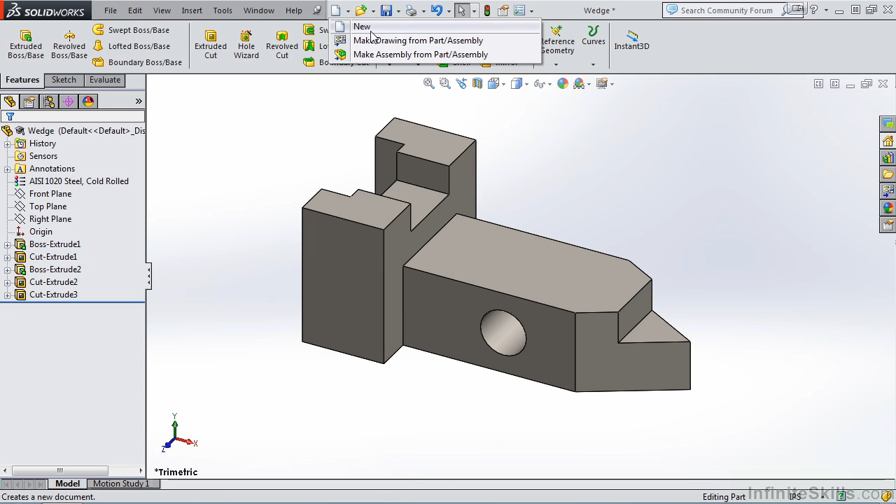Since we're talking about driven dimensions, there's really no need for us to be in the part environment. So let's go directly into the drawing environment and create a drawing for this wedge. I'll select the drop down next to New, Make Drawing from Part. We'll go with the same sheet size as in the previous lesson, and once again change the units to IPS. Just like the last lesson, I'll insert my front view, and place the front view, right-hand side view, and top view.

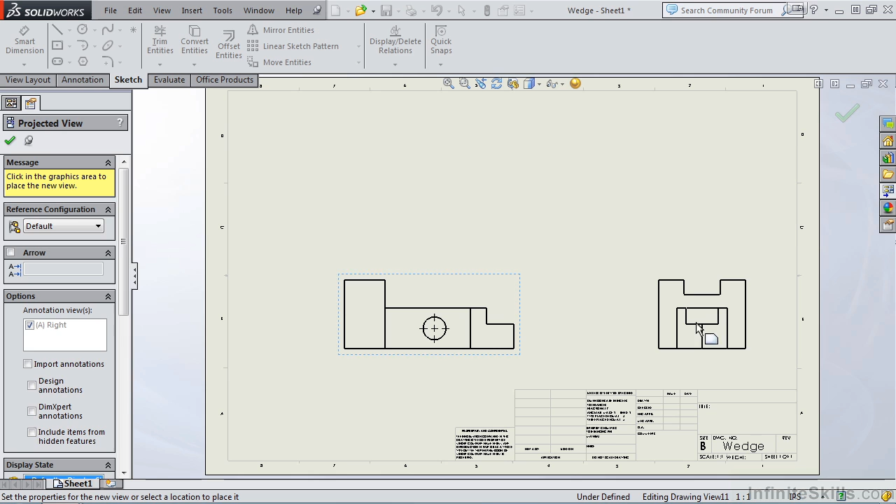Now I'm ready to insert driven dimensions. Driven dimensions are also found in the annotation ribbon, where model items is used for driving dimensions. Smart dimensions are used for driven dimensions. However, if I check the drop down below smart dimension, notice all of the different types of driven dimensions we can apply. Really nice, a lot of options here.

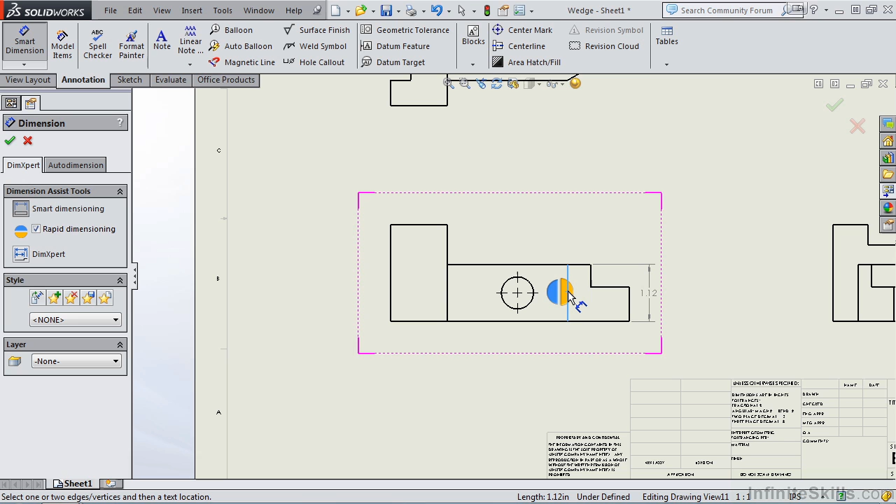I am going to simply select smart dimension. I'll go out to the screen and select this line right here, and notice it gives me a preview of 1.12 inches. Also notice I have a circle on the screen - we call this circle a manipulator. If I have my cursor on the right side of the circle, the dimension is placed to the right of the view. If I move the cursor to the left side of the circle, the dimension is placed to the left of the view. So that manipulator is very handy.

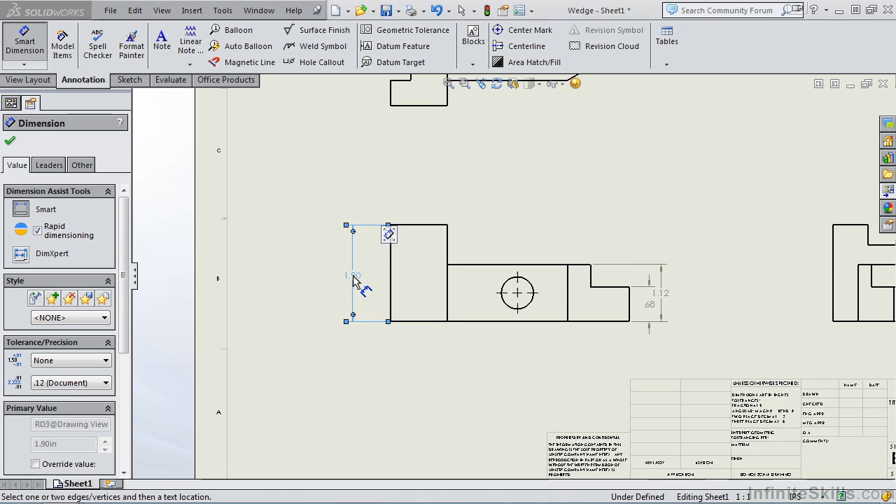Let me go ahead and dimension this feature. Notice how it moves the larger 1.12 dimension to the outside, so we do not have crossing extension lines and dimension lines. Now let's say, for example, you don't like where it's placed in the dimension. You can simply move your cursor away from the manipulator, and then you're free to place that dimension anywhere on the screen. Now, if we dimension a circle, notice the manipulator is 4 quadrants instead of 2.

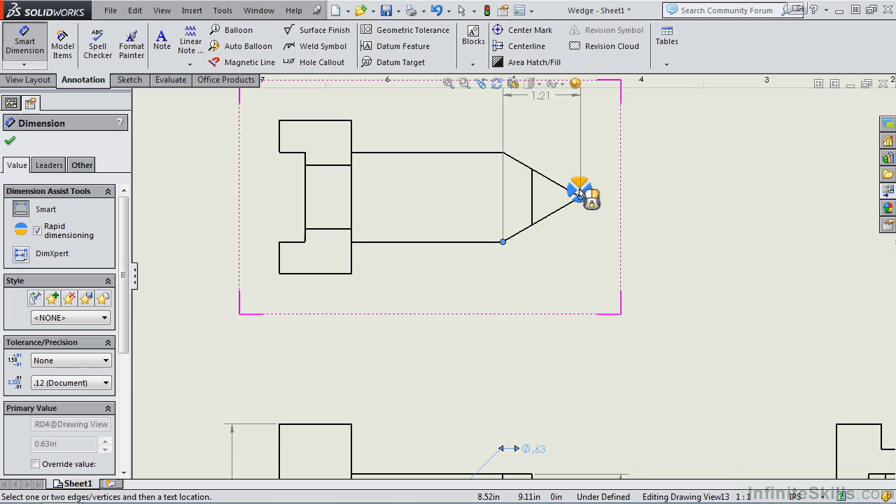And that's because we have 4 possibilities for the location of that dimension. Let's go up to the top view and select the 2 endpoints that make up this angled surface. I'll select this point and this point, and notice once again, the manipulator is broken into 4 pieces. The top and bottom will give you a horizontal dimension, where the left and right will give you a vertical dimension.

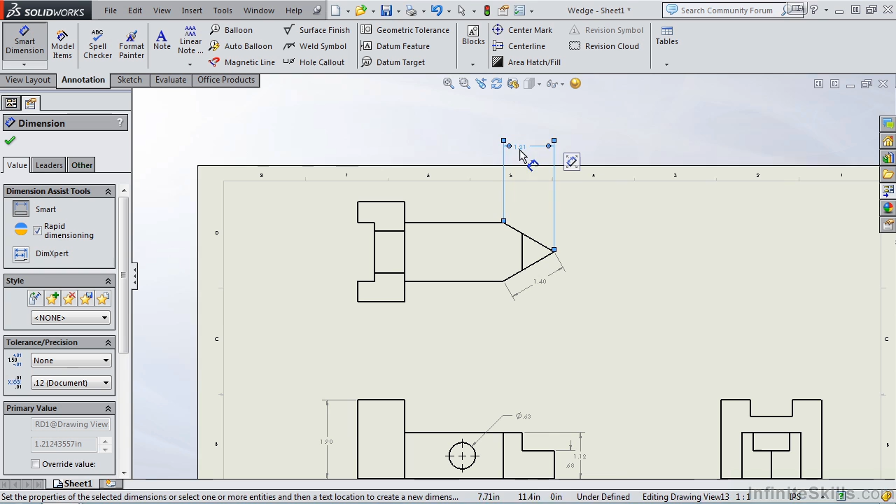If you wanted the true length of this line, then you would have selected the line instead of the 2 endpoints. I'm going to place it right here - that's a good clean location. And grab this, reposition it, and then pull the dimension back down in the view. Let's go back to the front view. I am going to move this 1.12 dimension to the right a little bit.

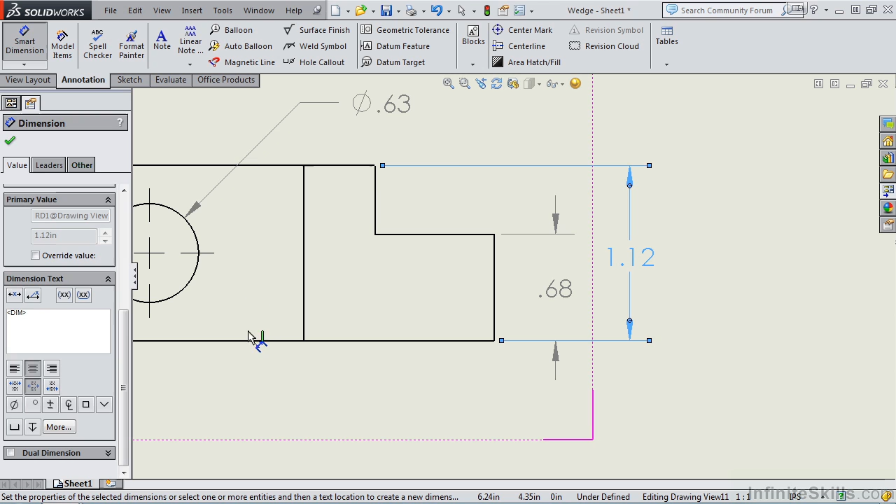Now when you select the dimension, notice, just like driving dimensions, you can click the arrows and the dimension will flip. And you also have the same options that you have with driving dimensions. You can add tolerances, prefix, suffix, and common dimensioning symbols. Let's go ahead and close out of the property manager and fit this to the screen.

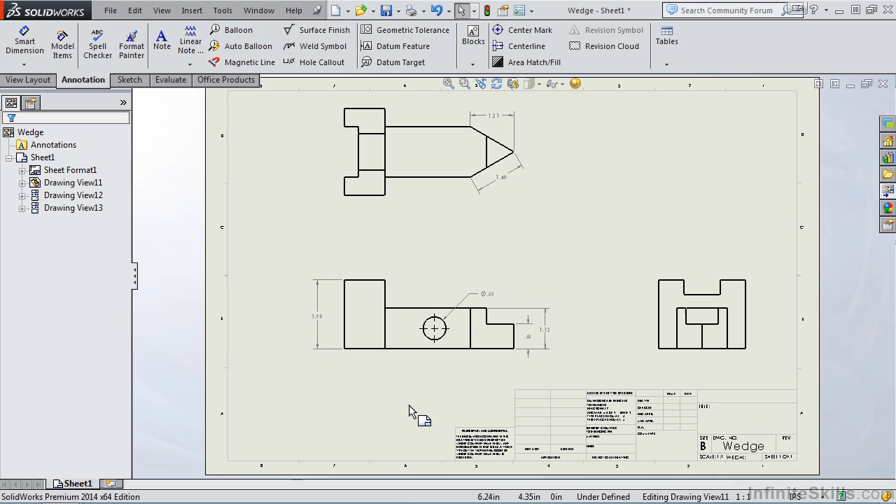That's a good overview of driven dimensions. A lot of people like driven dimensions over driving dimensions because with driven dimensions, you have more control over how they're placed on the screen. So you need to decide when you look at a lesson for driving dimensions and driven dimensions, what method seems best for you. I know a lot of people strictly use driving dimensions, while other people only use driven dimensions. But I also know another school of people that choose to use both in the same drawing sheet. So there's no right or wrong, just depends on what you feel is most efficient and what works best for you.